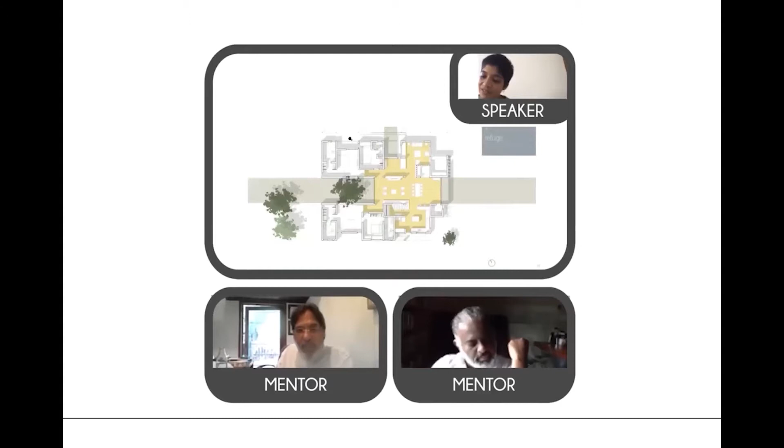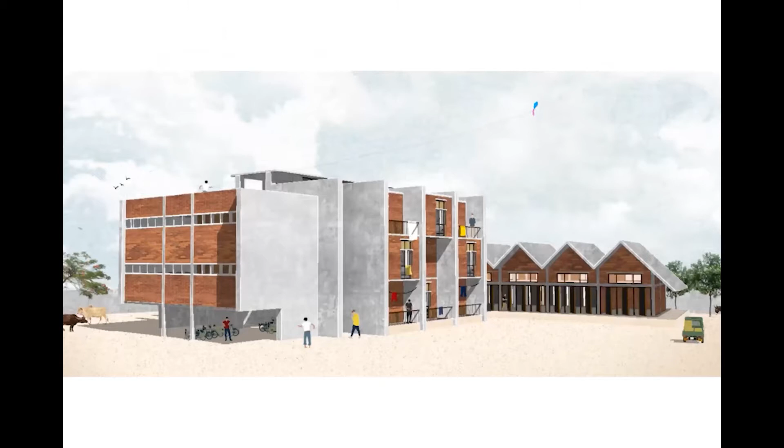Design United was created in March 2020 during a period of intense lockdown and quarantine measures within the region. The aim was to create an optimistic space for regional dialogue, connections, collaborations, and opportunities for young regional designers and design practices - a much needed network of support and peer mentorship during these uncertain times.

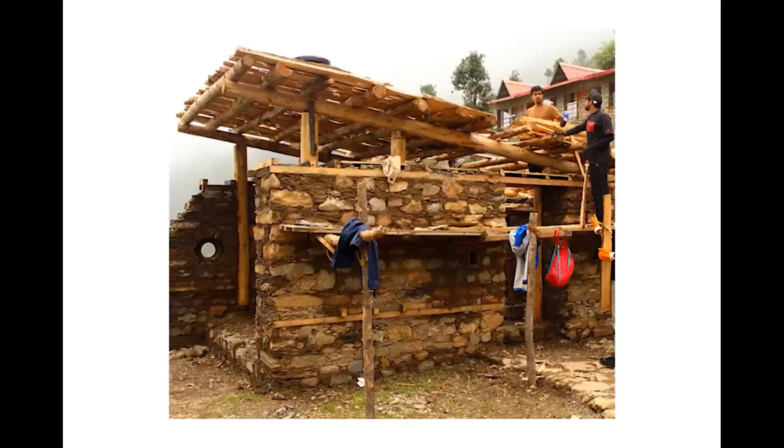Talented young designers and design studios working on design innovation with an approach relevant to our South Asian region have been invited to be part of the platform. Today's conversation is part of the Mentorship Series.

Mentorship and constructive criticism is essential for the growth of designers. Design United's Mentorship Series features two renowned practices from the region, Mindspace India and Kerry Hill Architects Singapore and Australia, with two exceptional designers and inspirational mentors joining us today: architect Sanjay Mohe from Bengaluru, India, and architect Tanuj Goenka from Singapore, sharing their experiences and design journey.

I'm Varuna Shashidhar, founder principal of the regional landscape practice VSLA, based in Bengaluru. I'm supported by my wonderful DU and VSLA team in this endeavor, along with Claywork Spaces.

Renowned Indian architect Sanjay Mohe was born and brought up in Mumbai and graduated in architecture from Sir J.J. College of Architecture in 1976, and went on to work with legendary architect Charles Correa. Mindspace was established in 2004 by architect Mohe, Vasuki Prakash, and Suryanarayanan. It is currently run by architects Suryanarayanan, Medappa, and Mohe.

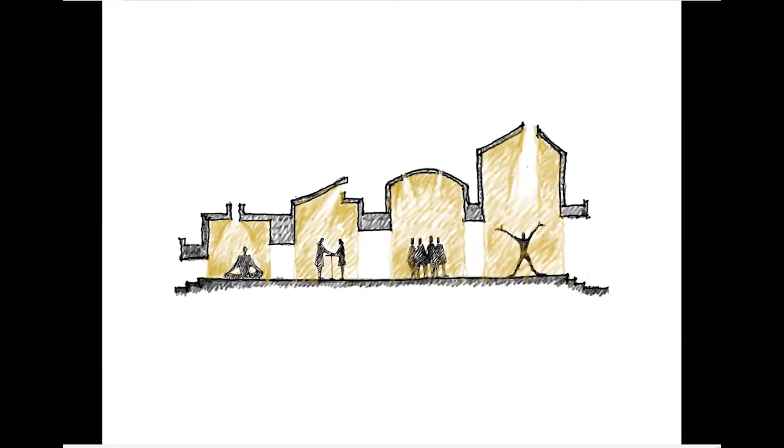But when we start designing, we start looking at different activities and then try to create a kind of space around that activity which would complement that particular ambience. So you start working with these different kinds of volumes, different kinds of light qualities, and start connecting those activities, and finally weave a story out of it. This has been the pursuit all the time, to achieve that in most of our projects.

Now, when you talk about the idea of a classroom, the idea of classroom comes much, much later. The first thing is to have a transfer of knowledge from the teacher to the student, and what would be the right space for that.

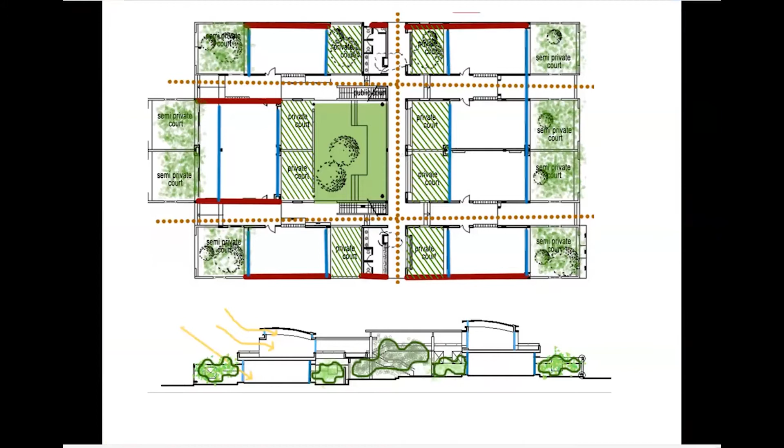Then when we started working on some projects where we try to look at the idea of a classroom, we try to give that option of either sitting in the classroom in an enclosed space whenever it is required, or sitting in a semi-open space, or sitting under a tree and then working. So you give different options for the activities and then try to respond to that.

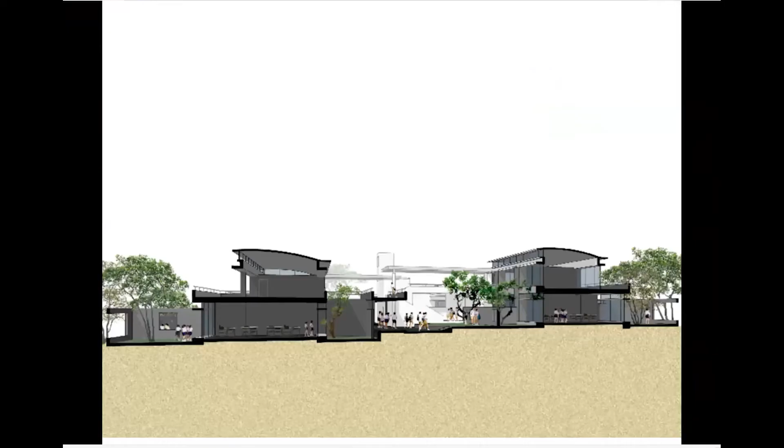Throughout the day, this road is so active, full of activities, that you never realize it is surrounded by these kinds of buildings, because the activities take over, the sound, the noise, and so many things happening around, and you never notice that these kinds of buildings exist there. Only in the middle of the night, when we used to work late on some of these designs and then walk on the middle of the road, would we notice this. So it's about the activities which really take over the architectural space and start dictating it.

So when you design architecture for the people, how do you really respond to this entire spectrum? You have a place at one end which could be a meditative place, and at the other end it could be full of crowd, full of activities, full of noise. So if you're looking at a meditation center as against a railway station, you have this entire spectrum, and you have to respond to the safety, the activity level, the sound levels, and the emotional engagement.

As a designer, you really have to look at all these aspects and try to see how do you stretch. Suppose you're designing a school - it has to have a place like a library and meditation place, so you need a quieter place. But when it comes to social gathering, the parents come together, it has to stretch to the other end. Probably when it comes to a house, you'd have a quieter place and a gathering space, but some houses entertain guests very often, and that's when it has to extend even further.

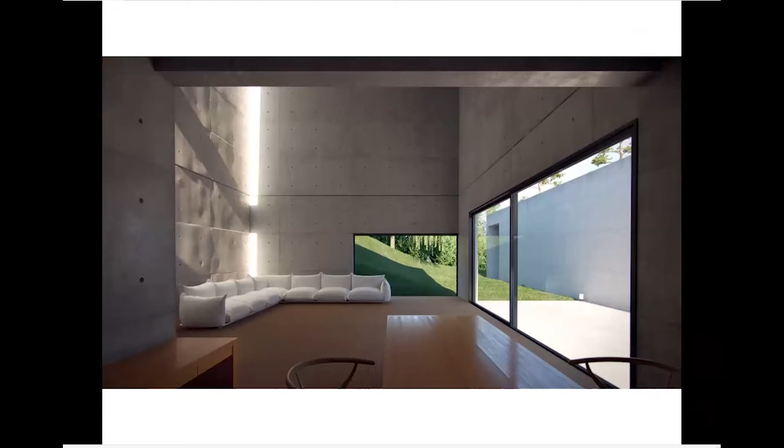This is more of a Japanese culture with tatami mats - absolutely minimal, very, very less furniture. It's something which is part of their culture, and they are most comfortable in this, and that's how Tadao Ando designs his work. We do get carried away by this because this is how we've been taught in all the colleges, everyone.

And then finally, we get absorbed into this whole background, and we sometimes lose our identity and become part of the background - that's our culture. So it's about absorbing memories, responding to that, and how do we really work with that?

So whenever you do a house, you try to make it minimal. This is a house which we had done almost about 20 years back - it started like this.

This is what typically happens in every house, because for the person who occupies the house, each object is a collection of a memory. It tells him or her a story, and they value it a lot. So for you as a designer or an outsider, it might look cluttered or terrible, but for the person, each object is telling a story and needs to have a place. This is how it becomes a collection of memories.

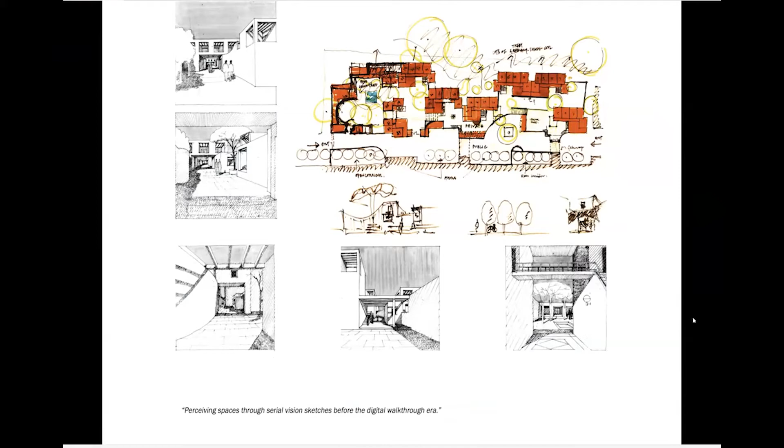This is something which we start. This is Satyajit Ray's sketches - before doing any film, he would actually capture that and then only start filming. This is something we had to do because we didn't have computers, so you'd either build physical models or do these sketches, which we still do, and this is where you have this unfolding sequence.

This is in Care College, where you create that path of discovery, or whatever ritualistic path. You go from here, go across, and keep discovering things, and this is what it looks like. You walk through this, go through that. You really don't know what is happening behind that, so there's a kind of suspense, a kind of curiosity.

It starts unfolding till it comes to this larger space, and then again you start walking towards the other side, go through that small opening, come to this tree, and get back. So this is the space I was talking about, which changes - these are recent pictures sent by students during lockdown, showing the way it is aging.

I'll show you about this Sai temple, which we did recently in Trichy. We had done one temple in Bangalore, and the Swamiji who was instrumental in that temple - his house, where he was born, is in Trichy. The management wanted to restore it, make it like a museum, a collection of his belongings, restore it, and then build a temple behind it. So this house plus the plot behind was what was bought, and this was the road.

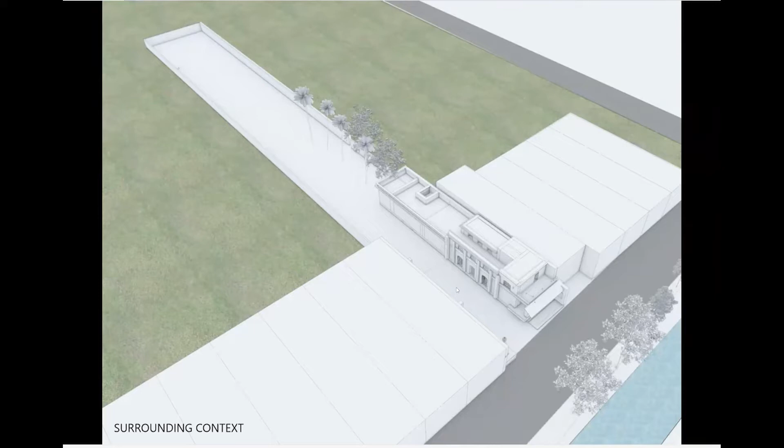This was part of the site, and the one behind as well, which is very long and narrow. We started working on it - water canal, trees, existing trees here, a very long and narrow site. Then there's one small Tulsi thing here, which became an axis to start the design, and we responded to that, creating a plaza and opening.

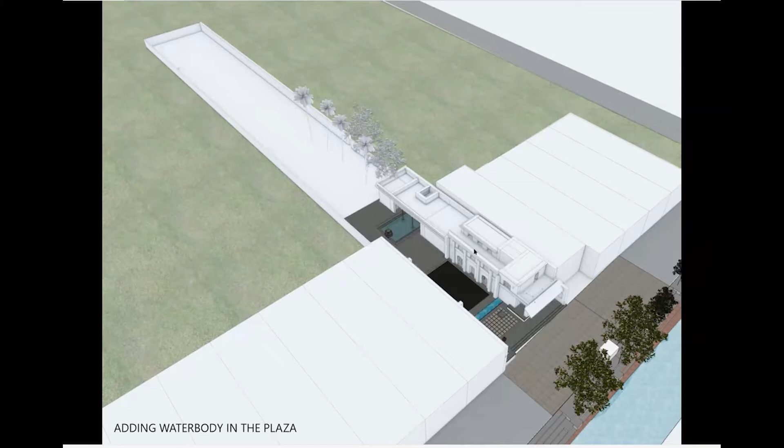This is where that well is, which I showed you. We opened this and created a water body there to open it up. This became a kind of threshold space, so we created these two walls to enclose that - you clean your feet here and then go in.

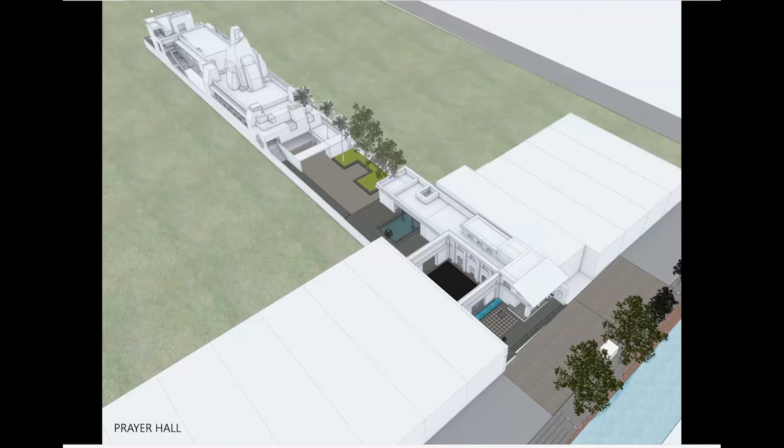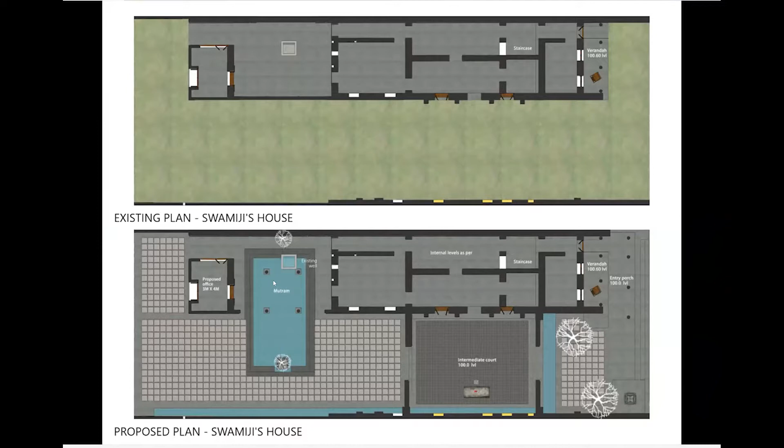This was a guest house they wanted, for a few people to stay. Then this temple came up, and we started developing this as an entire sequence of unfolding images - the sections where the light comes in, the different sections. This is how this space was, and we opened this and inserted this water body, which became a very interesting space when we saw people using it.

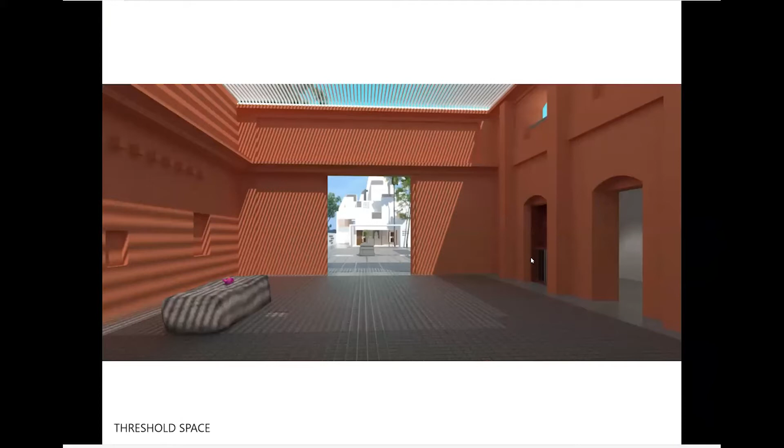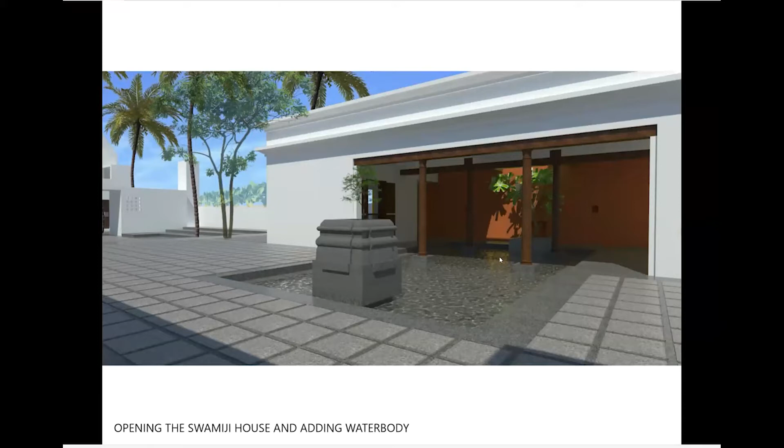These were very initial sketches. We opened up this so people can walk in, look at the belongings of Swamiji, and then go further to the temple - so this is how that transition space happened. This is that old well which opened up, and these were initial designs of the way the light would come into the space.

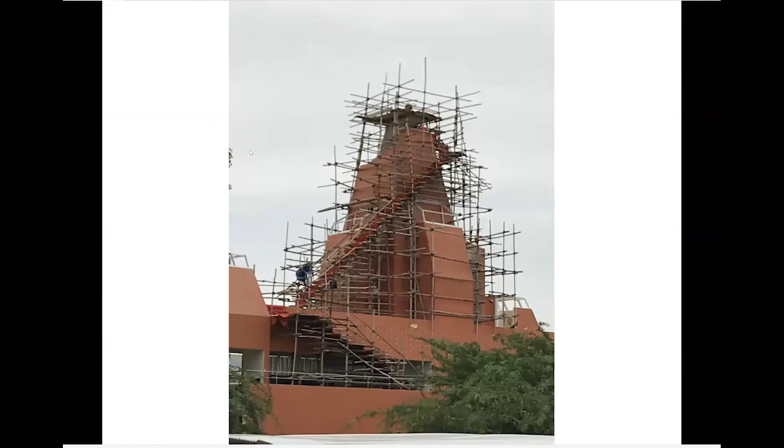Then the inauguration happened, and one of the rituals of inauguration is to have this kalasha here, where all the people go and do abhishek. The main deity has to be exactly below that, axially under it, so this thing was built mainly for everyone to climb up and do that puja.

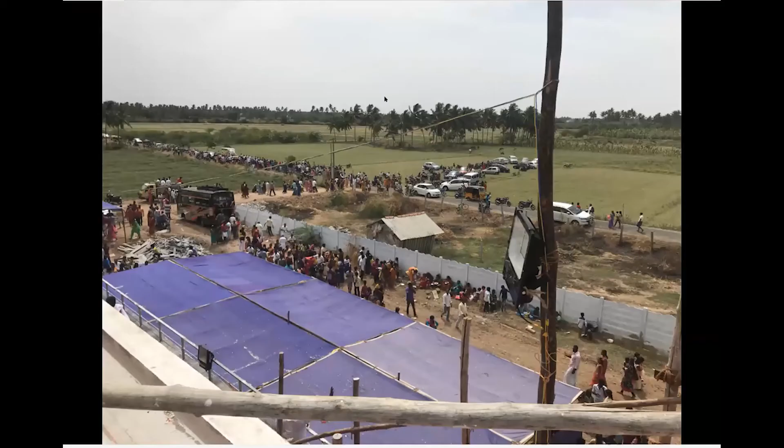It was amazing - this was such a quiet place, but when we eventually came during inauguration, we suddenly found people walking from all over, forming huge queues, and that was exciting. We couldn't even enter the place. So this is that in-between space, and then you see the temple.

And then this water body became almost like a sacred place. People almost everyone wanted to touch that water. Now, just after this, the lockdown happened, so after that we couldn't go there and take pictures as well.

Part of it is done, part of it is still going to happen. But as a ritualistic path, I wanted to show this project and the kind of people involvement, which is actually you design your buildings for the people, for this thing to happen. So if you see their faces and the kind of faith that they have, it feels very satisfying just to see that. And these were some pictures which we got a little later.

Actually, we have not visited it during the last almost 8-9 months. But this is that house. A lot of detailing still has to come in. But this is that water body, the front part, and then the... So these threshold spaces is something which our climate demands.

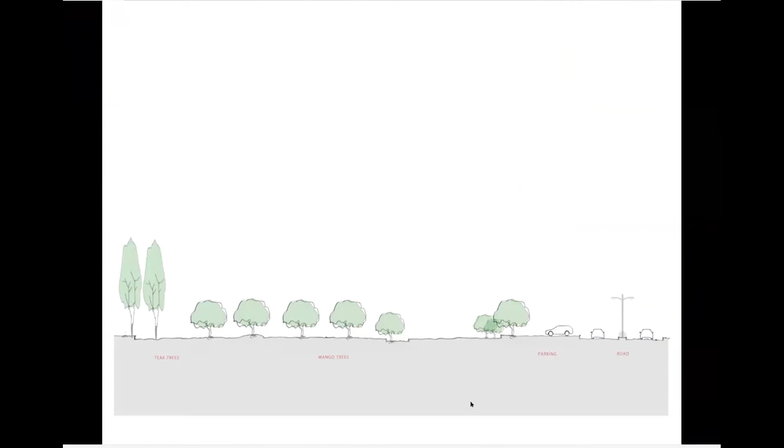Because it is your house, your belonging, and there's something very important happening inside. But that threshold space can belong to outside as well as to inside. And that's what fascinates us, and we try to create that in every project. How do you create that space which, when you are there, you wonder whether it belongs to outside or to inside. So when we were doing this school, which is for Brigade, this was one of these mango orchards kind of thing.

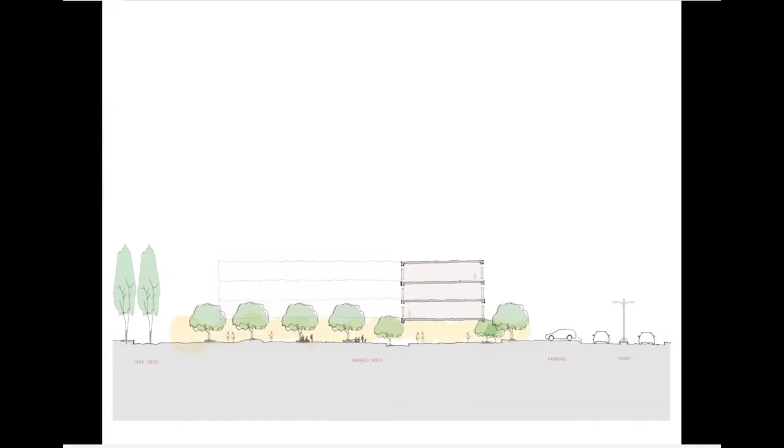So we tried to save almost most of the trees. A few, 5-6 trees had to go wherever this building came. But we wanted to create that transparency, that openness, and then float the building above, have this landscape going through, and allow different activities to happen here, because we felt that education doesn't only happen in the classroom. It has to happen under the trees as well, so that would become an extension of your learning experience.

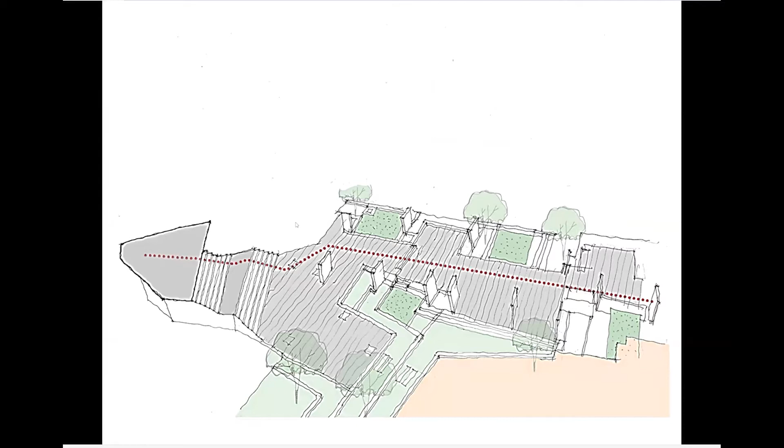And then this path starts from one end and starts climbing up across the spine. It becomes an amphitheater, then goes up, turns around and starts climbing up again. And at this point it becomes part of the facade. So the children, when they walk up and down, they are witnessing even the outside world. And from outside, when you look, you see the students running up and down, and we wanted it as almost a dynamic facade with the people's participation.

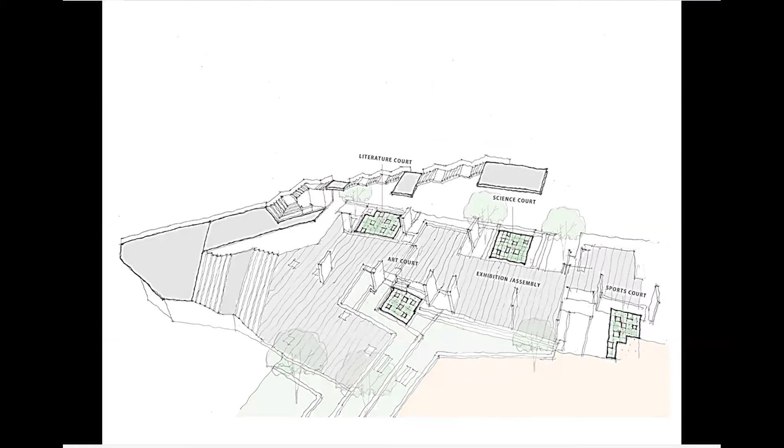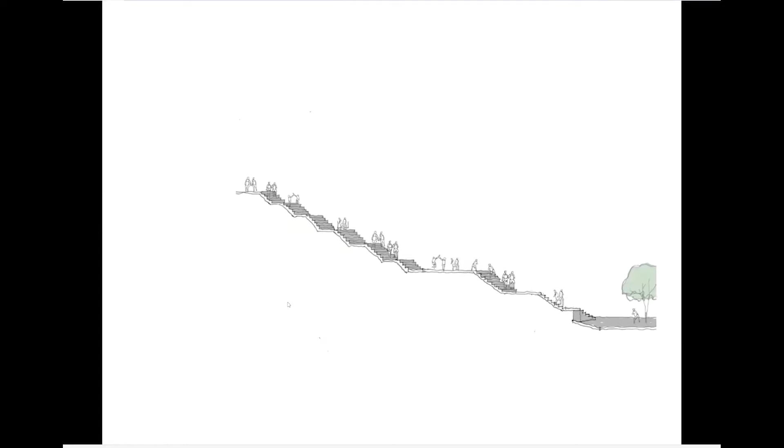And then you have a lot of these volumes where the classes would be conducted, and we're just responding to these volumes and creating that transparency across with different kinds of sections, so it's not like a ground floor or a first floor, just the spaces flow from one to another, and eventually it becomes part of the facade. So you come in from there, start climbing up, and then that becomes part of the facade. And these are the different volumes, different details.

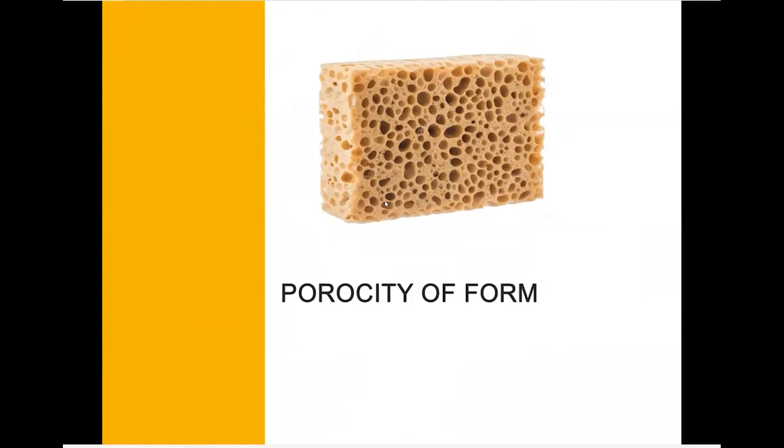But that porosity is something which is fundamental to our climate, and this is something that allows the breeze to go through. This is again completed during the lockdown, so the admissions are happening but the school is not yet open. Some kids had come to take admission, so that time these photographs were taken. So hopefully we want to see this full of kids running around and enjoying these spaces.

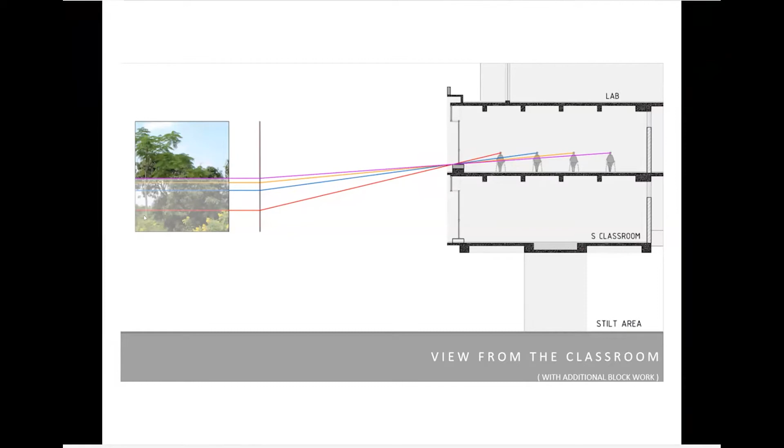The last one is about the pause, the meditative kind of thing—how do you really create those quieter places? IIM Bangalore by Mr. Doshi is probably the best example where you feel that idea of a meditative pause. When you are there, you have some sense of peace, some sense of tranquility. We've been fortunate to work on this building, trying to add a few things without disturbing what Mr. Doshi wanted to preserve, and trying to be as sensitive and quiet as possible.

What I'll quickly show is this memorial we did for Dr. Anji Reddy in Hyderabad. There's a video on this called Presence of Absence, so I won't go too much into detail since there's no time. There's a research center, and beyond that was his house. He would take that path to go to his house, and he would take some of these visitors, including some Nobel laureates, along this path while going to his house for lunch.

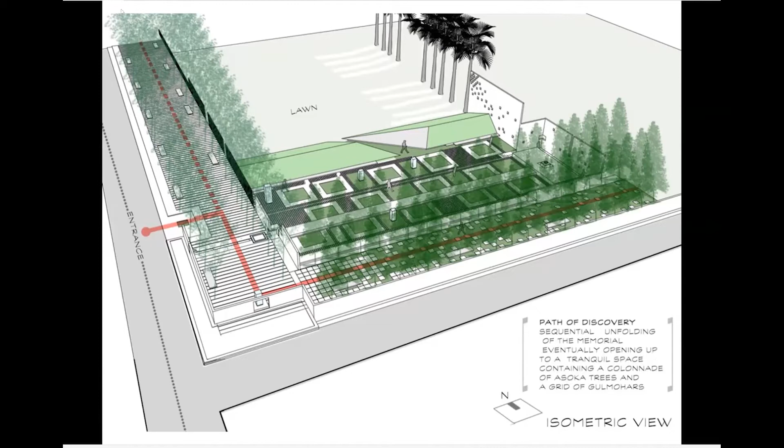On one end is his bike, which he used when he started his career. On the other end is his first Mercedes, which he was proud of. So as you actually climb up, you go towards that Mercedes, and there are different paths.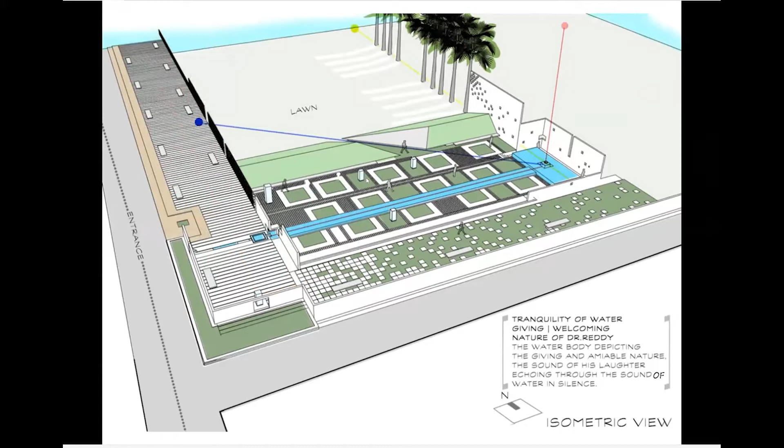So you have path one, two—there are four kinds of accesses where the collection of his belongings is kept. This is the path he used to take. This is where his ashes are kept.

This almost creates a void, and when you look through, you see this void, a reflection of that. During lunchtime, when the scientists take this path, they just get a glimpse of this, because a lot of them worked with him and get connected and energized.

You have a lot of benches here where you can sit, with motivational inscriptions on them. It's kind of a sense of discovery—you go there, you see this series of frames, you come in, and you discover the whole space.

That's the bike, the other end is a car. This idea of giving something, which he did throughout his life—either knowledge or money—you can touch it before you enter, and that's what is nice about it.

And you again rediscover it—that's the space, that's the void. As you walk through and walk down, this water level comes closer to your eye level, and then it feels much nicer there.

As I mentioned earlier, we have limited the theoretical ambitions of our practice to a few qualities. One of these is exactitude, and the other is authenticity. Exactitude in our projects means editing and distilling the design till there is neither too much or too little of anything, where one material pays respect to another.

Authenticity, on the other hand, is not so easy to read. It has to do with a genuine origin. It is felt as much as it is seen, and we believe it evolves through intuition as much as through critical observation.

Building appropriately is also very important to us. As future architects, it's very important to ask the question if one is in the business of architecture or practicing architecture as a business.

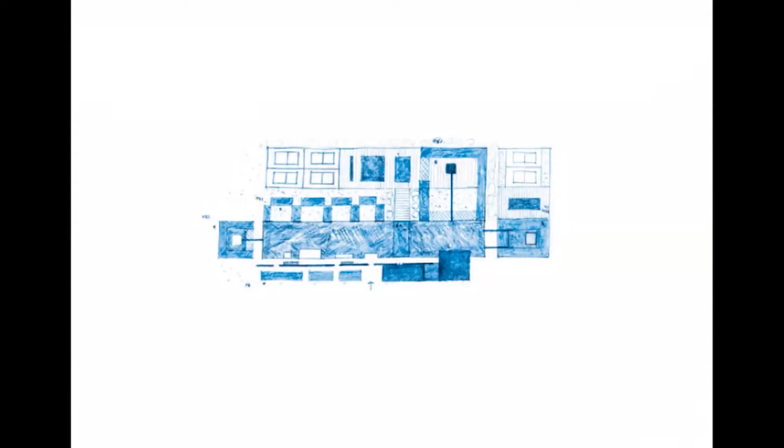The most unifying strategy in our work is the plan, which is very important. Plans embody abstract notions of building forms and volumes, tradition and culture, all of which shape our buildings and inform the appropriateness of architecture.

We extensively use models as a design and presentation tool, and our models have been exhibited in Tokyo and Shanghai. Over the last 40 plus years, our work has taken us from Nevis in the West to Japan in the East and across various building typologies.

This afternoon, I'm presenting 3 projects which represent 3 different contexts, 3 different project durations, and 3 very distinct journeys that the studio has been through. All 3 of these projects, I hope, embody the principles that I have just articulated.

I'll start with Maldives, which is a project currently under construction. This journey was a short journey. It's only 5 years long. The project is opening in the next 3 months. Maldives is our first island hotel that is under construction.

Over the years, we have been waiting for the right project to come our way that would allow us to break away from the expected way of building on an island next to water. For all our projects, we like to go back to first principles, draw inspiration from the site and its history, and explore a strong, contemporary, and appropriate response to the design brief.

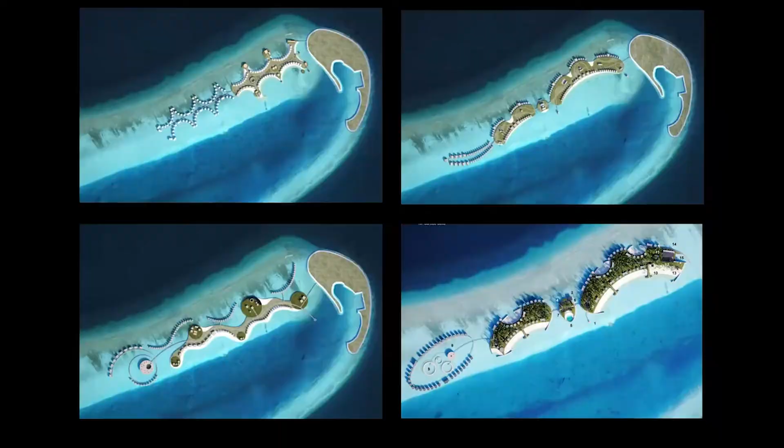So once we designed the shape, we took a decision that we are going to embrace the idea that the islands are man-made, like a lot of the islands in Maldives, not try to make the shape look natural, and embellish the man-made nature of these islands.

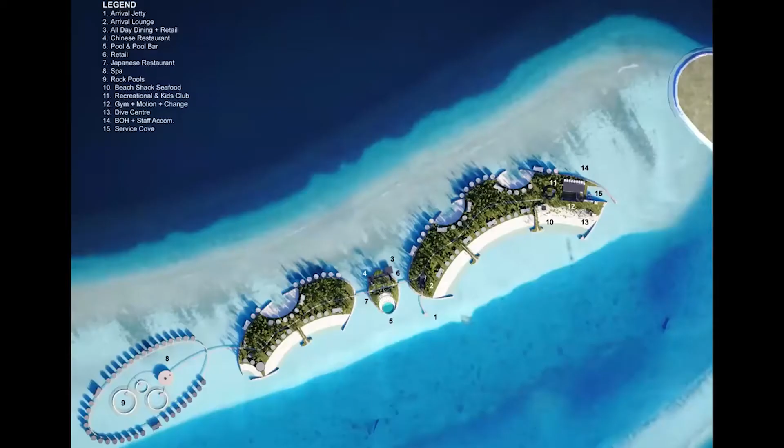So a few images showing the islands taking shape. That was the final master plan, which is a series of 4 islands from one end to the other. It's around 2.5 kilometers long. And it is a 100-room hotel for the Ritz-Carlton.

The islands, as well as the architecture, are very simple geometric forms and shapes. They express their man-made nature and a pragmatic response to the oceanographic conditions.

The islands taking shape on the reef start with a bund of sand. You start to understand the scale of the islands being reclaimed, and slowly over a few months the site starts to take shape, held in place with granite boulders forming revetments.

The site had two very distinct faces to it: on the left the calm lagoon, and on the right the open ocean. The shape of the island reacted to these natural currents. The side facing the open ocean was more protected and more solid, where most of the walls were, while the wide sweeping sandy beaches were towards the calmer lagoon on the inside.

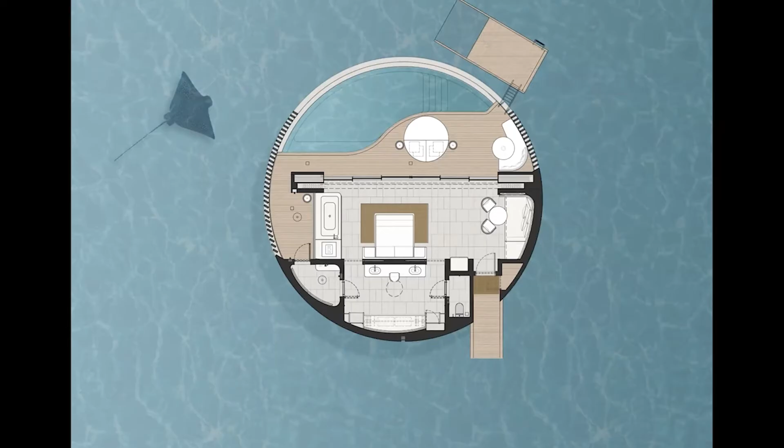Some initial models showing the guest room. Each overwater guest room has a private pool and a sun deck, but very simple forms, over water and on land.

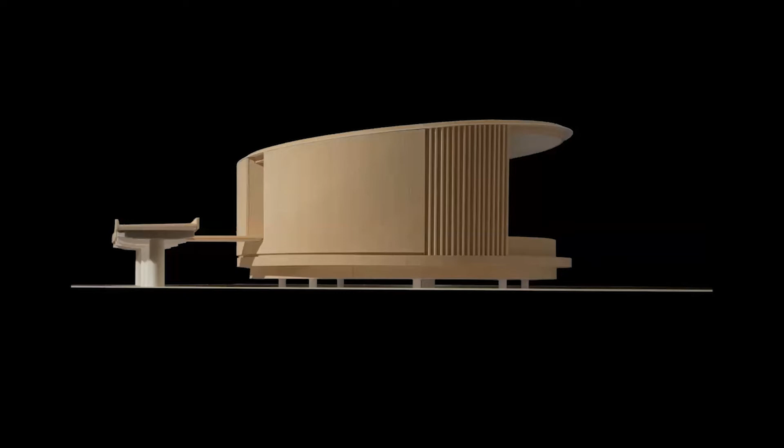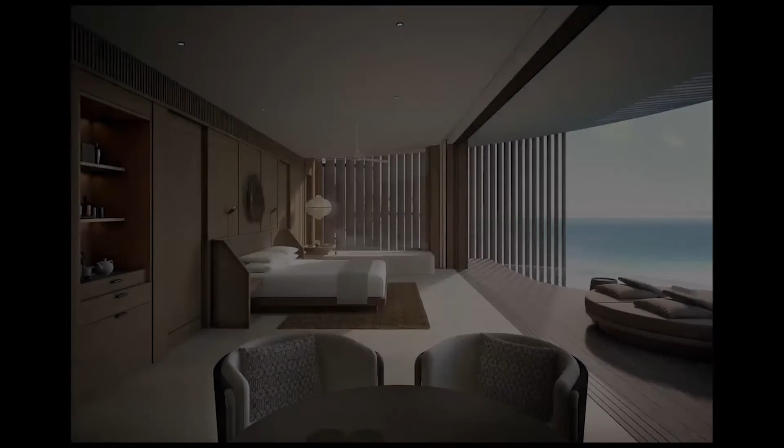While designing the project, we were quite aware that we needed to introduce sustainable features within the project itself. The shape and form of the building was influenced by the angle of the solar panels that needed to be installed on the roof, and close to over 30% of the energy of the project is from solar.

The detailing has been kept very simple, and exposed channels, as you see on screen, are neatly inlaid into the cladding and bring the water down from the roof.

So these guest rooms either form a ring of rooms over water, forming the water island with the spa in the middle, or on land, they are located in private alcoves and smaller beaches, forming smaller communities of guest rooms.

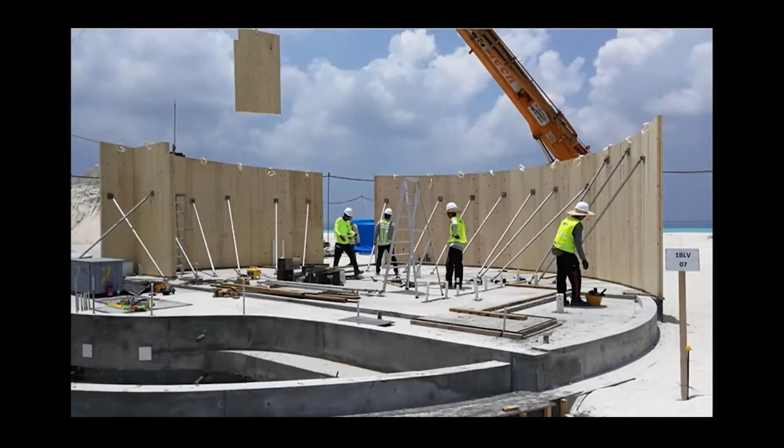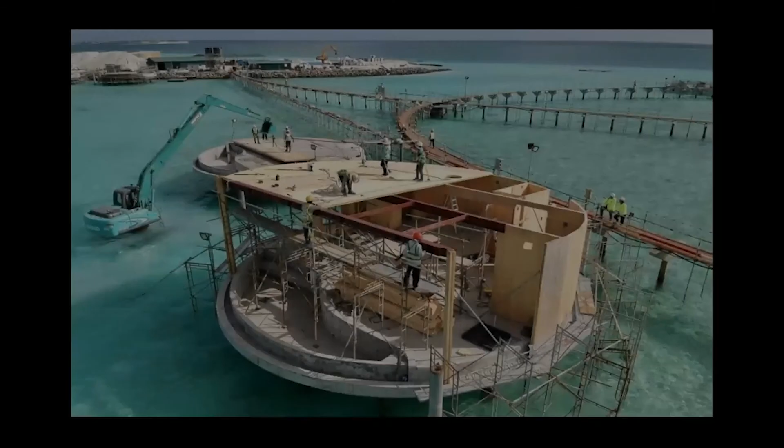We have used cross-laminated timber for the walls and the roofs, and this, together with the widespread use of photovoltaics, helps reduce the carbon footprint of the project. The CLT also allows us to keep the construction precise and reduces the amount of cutting and in-situ works on the property itself.

Each one of these 80 square meter structures takes 4 days to complete on site because of the assembly of the CLT.

In addition to the guest rooms, a lot of the public area buildings are also built with the same CLT material. We have developed a series of very simple pavilions and frame structures which have been used at different scales across the project to form the public areas and other buildings.

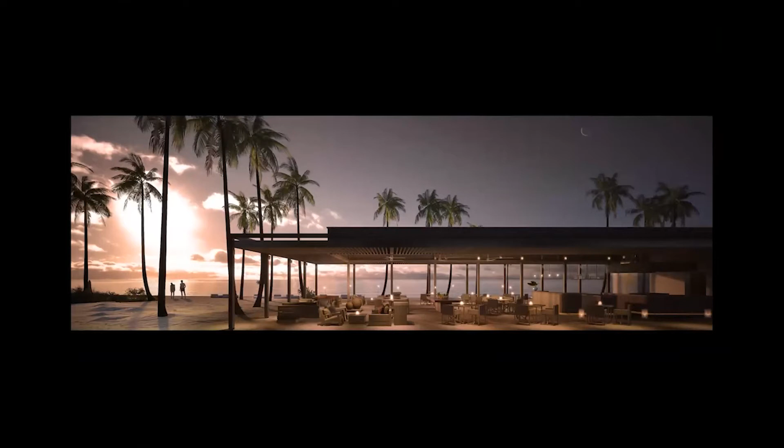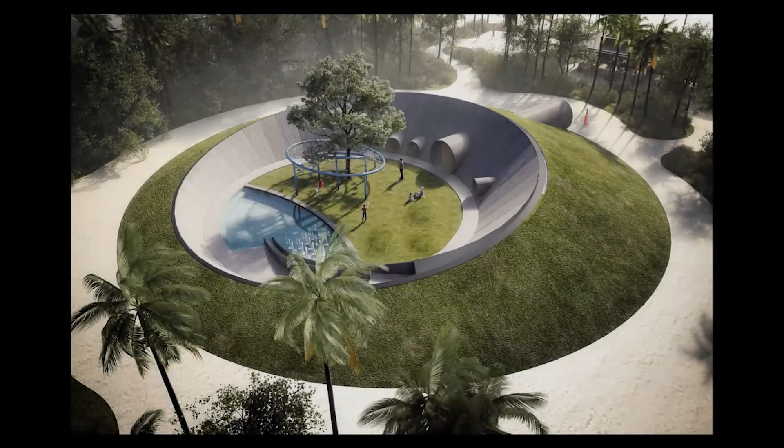We've also enjoyed designing other elements in the project, like the Children's Club, which is a world created for the children in the center of the island. So there are different destinations that have been created within the project itself.

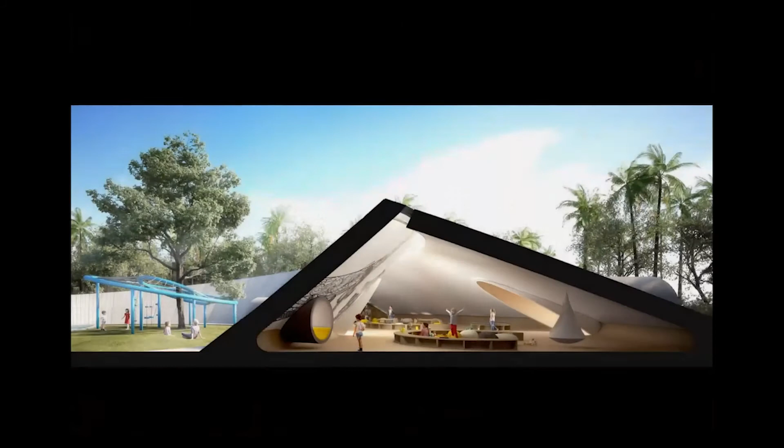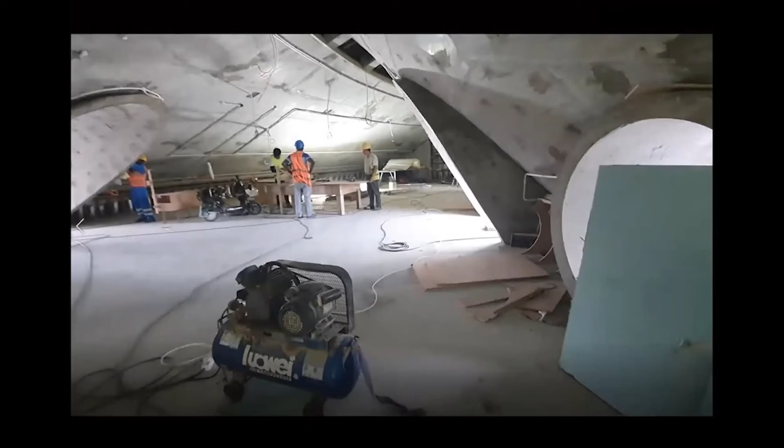Just like the guest room, the spa, which is in the center of the water island, is a circular form which looks inward into a courtyard. With the lighting designers, we have designed the spa facade so that it prolongs and extends the sunset around the project. The lighting has been designed to work with the normal sunrise and sunset times and glows to prolong the sunset itself.

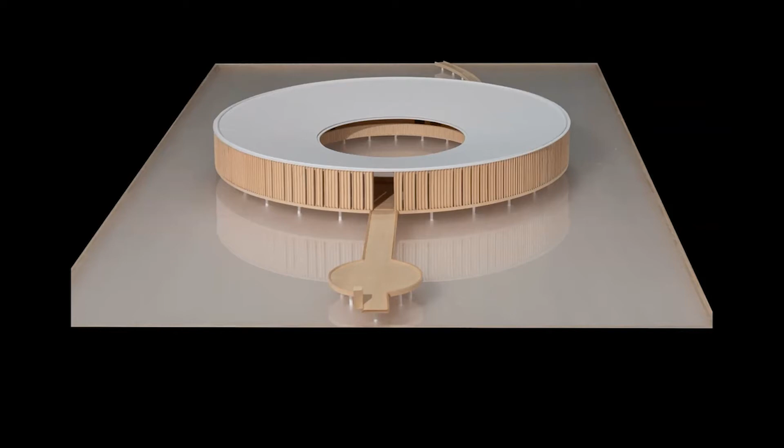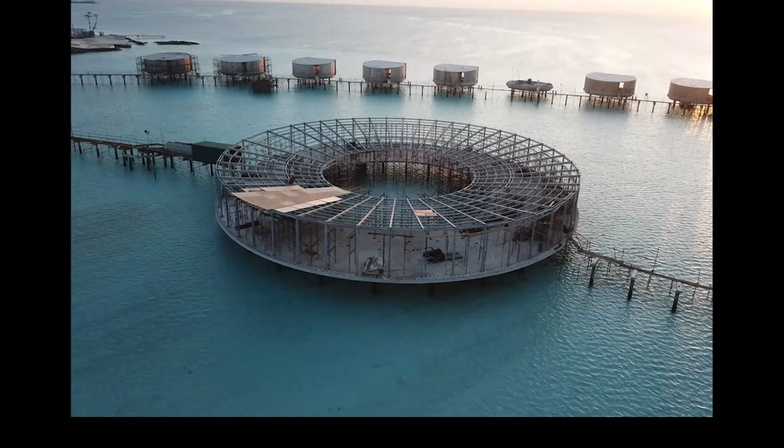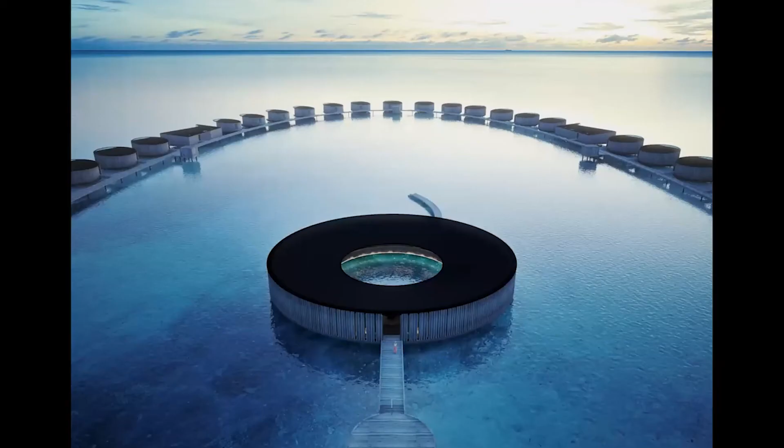This is an old slide, but it shows the spa under construction with the guest rooms around it. Another view of the spa.

The property, as I mentioned, is scheduled to open in May this year, and it has been an interesting journey for the office to design something which is for the Maldives—it breaks the traditional way of building in the Maldives and gets away from it.

The second project I'd like to show is Aman Yangyun in Shanghai. The office has been working on this project for close to 10 years, and we continue to work on the larger community around Aman Yangyun. I think we'll continue to work on it for the next 10, 15 years.

The story of Aman Yangyun begins about 25 years ago, 700 kilometers southwest of Shanghai. A construction of a large dam threatened to destroy villages which contained very ancient Ming and Qing dynasty houses, as well as a mature camphor forest.

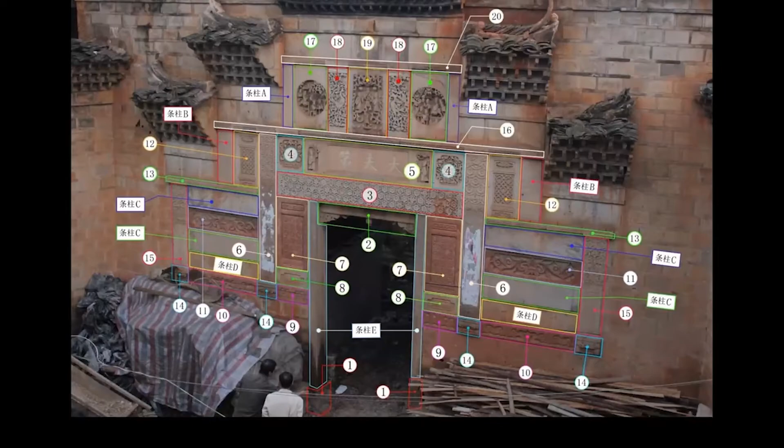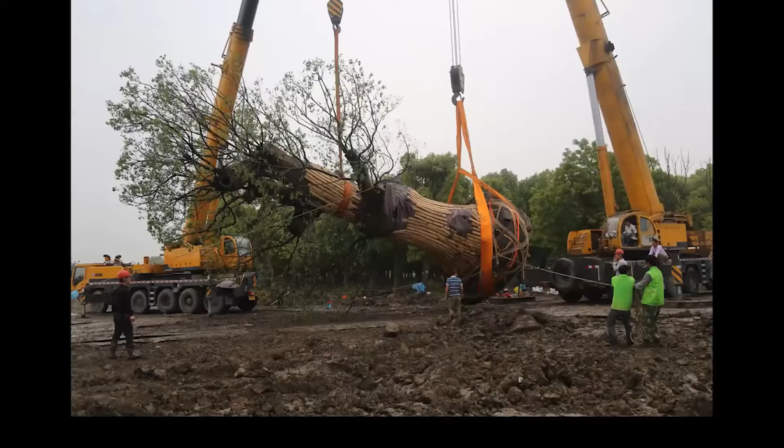Our client began a private initiative to rescue this valuable heritage, documenting and dismantling over 50 of these houses. Every brick, tile, stone, and structural timber was transported to Shanghai, where they were stored in warehouses and reassembled with great care and skill. In addition to the houses, 10,000 camphor trees, many with trunks over 1 meter in diameter, were transplanted to a tree nursery close to the project site.

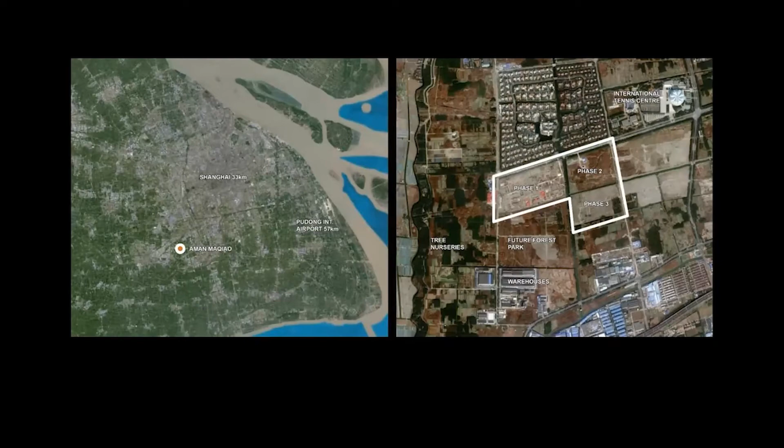In 2009, we were asked to imagine how this collection of ancient houses could be resurrected and woven together with the trees into a master plan for a 43-hectare site on the outskirts of Shanghai. The master plan consists of 4 quadrants separated by waterways. Aman Yangyun was conceived as a contemporary walled village in a forest, and a riverside avenue leads guests to the arrival.

Spaces unfold at a variety of scales, becoming more intimate as we move from the main avenue towards the hotel arrival or the residential villas.

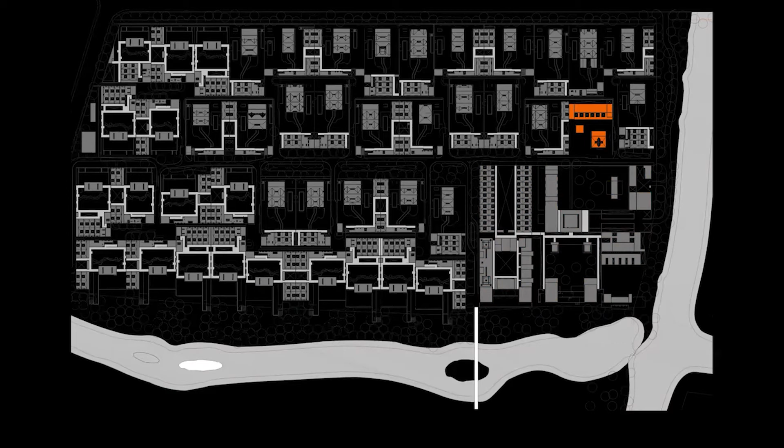This slide shows the location of the hotel and 24 suites. The Nanshufang, which is the library, used to be the school of the village before it was dismantled and moved to Shanghai, and now has become the cultural heart of the property. 43 villas make up the Aman Yangyun community, out of which 18 are private and the rest are part of the hotel.

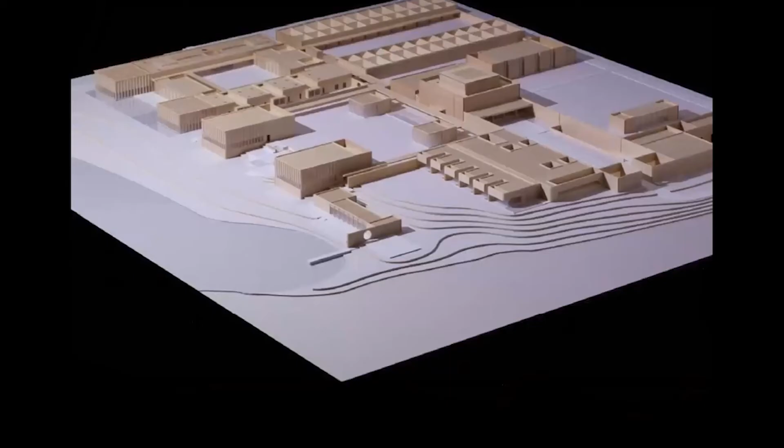The master plan creates opportunities for every venue to have a distinct landscape setting, from the arrival to the hotel, which is a strong cubic form with a glazed lantern on top that glows at night and floods the interior with sunlight during the day. We've kept the entrance quite modest, so it contrasts and heightens the sense of drama as you enter the main reception space.

The interiors are paneled with finely crafted screens, which we designed for the project, made from Nanmu, a gold-flecked wood traditionally used for noble Chinese buildings. This geometric screen pattern is an abstraction of a traditional Chinese cloud motif.

We're using these screens, and for most of our projects, we design from master plan all the way to the architecture, the interior, the lights, down to the soap dish in the rooms. We are involved in all scales of the design, which helps us keep the integrity of the project and a common thread to it.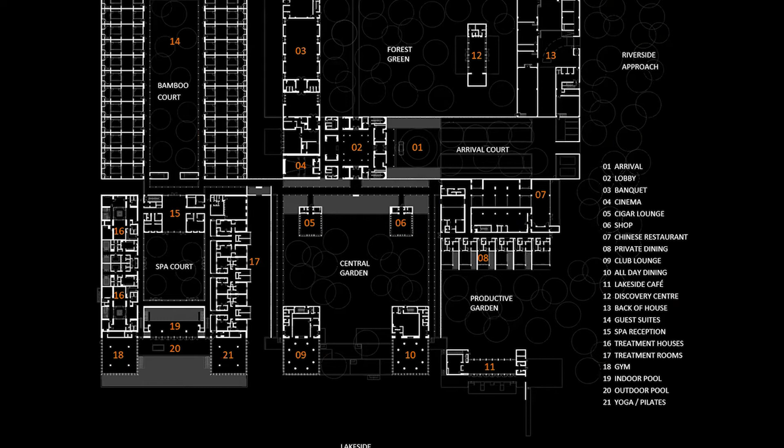The buildings around the central garden are kept as simple, rectilinear architectural forms, clad in a pale gray Chinese sandstone. Walls are load-bearing, made with solid blocks of the same sandstone.

Movement around the hotel is a carefully orchestrated journey. Dining terraces and restaurants overlook the lake and the forest park across the water.

Because the site was not able to accommodate all of the camphor trees that were moved to Shanghai, the city established a forest park across the hotel, across the lake, which took the remaining camphor trees.

Views of the landscape and filtered sunlight animate the tall volumes of the main restaurant. In contrast, the Chinese restaurant is more internalized and borrows light from courtyards.

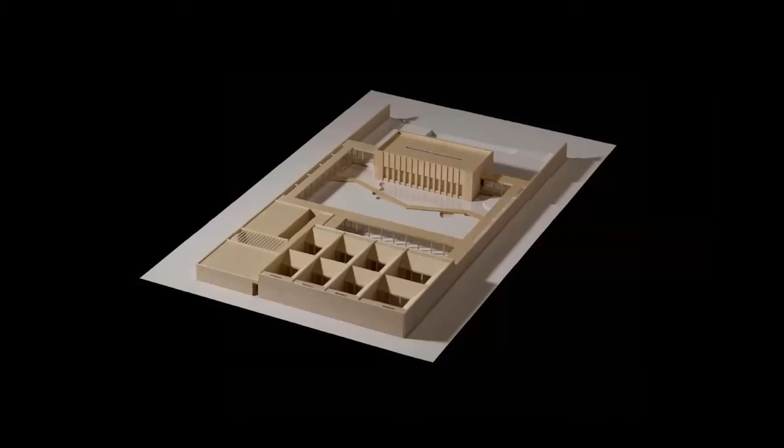The villas are designed as a walled garden with either a contemporary pavilion, which is what you're seeing in the model, or an antique house at its heart. Each villa sits on 3,000 square meters of land.

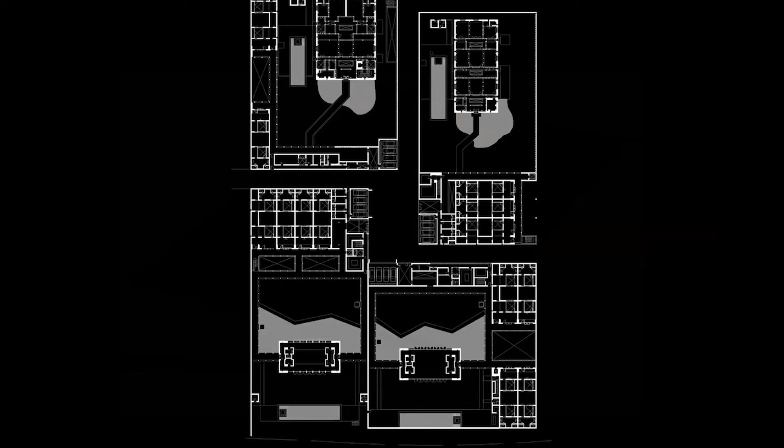These villas are clustered in groups of 4 or 6 with entries from shared courtyards, again creating communities. Thresholds and changes of scale are a recurring device within the architecture of Aman Yangyun.

One courtyard leads you to another, and each courtyard has its own character. They form thresholds between private and public.

The private gardens within the villas, as I mentioned, either have an old ancient house or a contemporary pavilion.

The landscape elements for the project were designed specifically for Aman Yangyun. That's one very interesting aspect of this project, because we were given enough time by the client to develop the project and develop different elements of it.

We were able to work with local artisans and craftsmen from across China. Before we even started designing the project, we spent a fair amount of time in China going to the villages from where these houses came from, to understand how they were lived in.

We worked with different experts that the clients introduced us to, so that we could understand with their help how to design and work with these ancient houses.

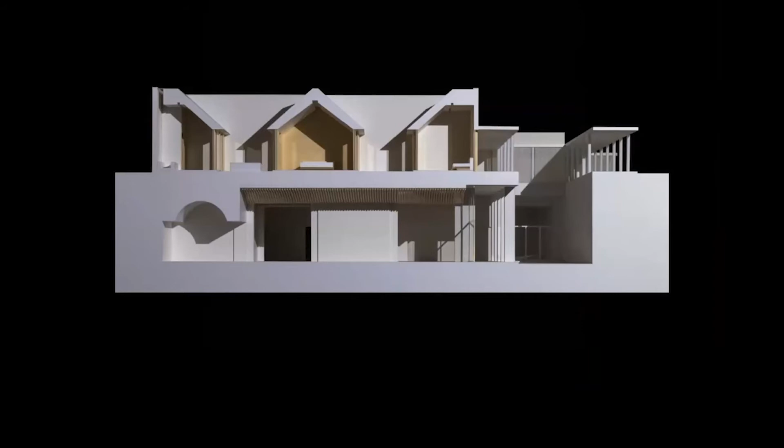Each villa has also extensive basements with tall vaulted volumes and galleries, which borrow light from generous sunken gardens. And the basement provides amenities like cinemas, wine cellars, gyms, in addition to the art galleries.

Another interesting aspect of this project is the ancient houses from the Ming and Qing dynasty. We had a team working on understanding these houses and their ordering principles. All 50 of the houses that were dismantled and brought to Shanghai were different in shape and size. But when we studied them in detail, a common thread and types started to emerge.

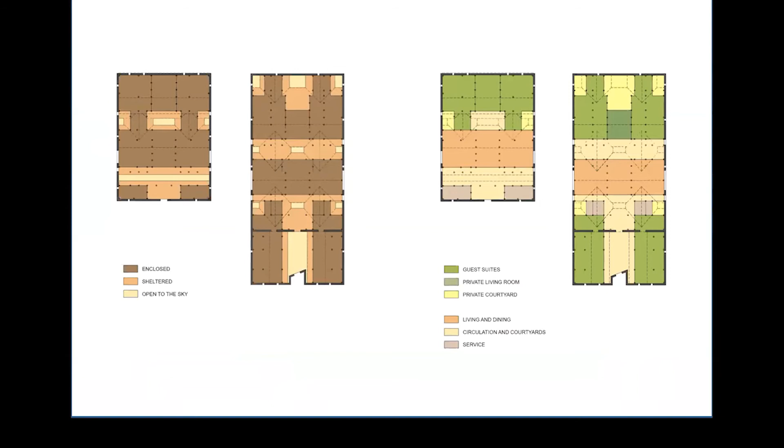The sizes were quite different. Some of the houses were over 900 square meters in floor area, and others were smaller at 300 square meters. So again, to adapt the houses for it to function as a hotel, accommodation, and public areas for the villas, and also bring in modern amenities and weave in MEP and fire and seismic requirements was a challenge.

The walls of the villas are formed by the new, with the old located within the garden. We had the time, thankfully, to go through prototypes of the antique houses, how to assemble them together, and how to bring light and ventilation into the interiors without disturbing the fabric of the antique house itself.

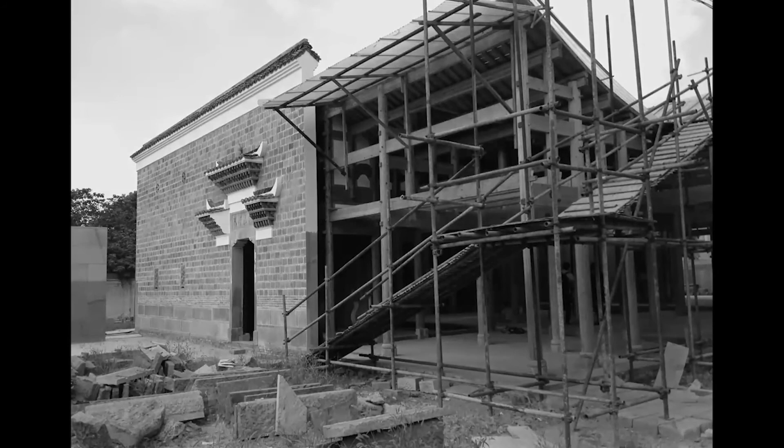The original team of masons and carpenters who dismantled the houses over 20 years ago, they were responsible and they worked with us to put them back together again. Most of these houses do not have any nails. It was quite important to find the point from where you start dismantling without breaking any of the timber. It's like a jigsaw puzzle.

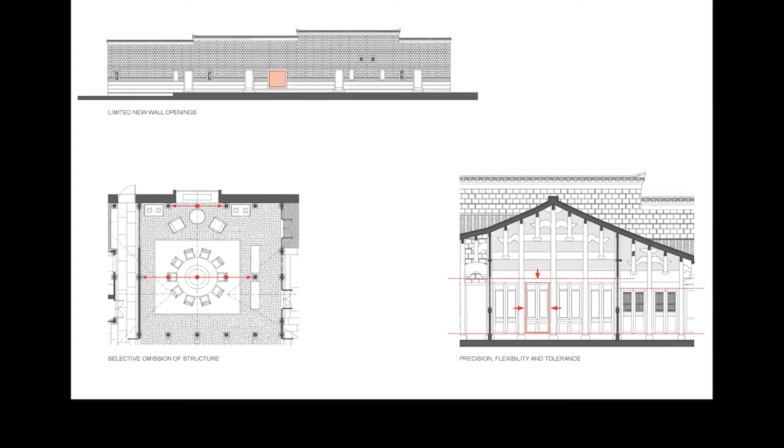Targeted modification to the structure and fabric of these houses were made to make them livable. In certain cases, trusses were shifted to optimize room dimensions. But again, when we were designing the interiors and the architectural shells and adapting them to suit what was requested by the hotel, we were quite careful to make sure that whatever was new was very clearly articulated. Some of the ceilings were omitted to reveal the spectacular roof structure.

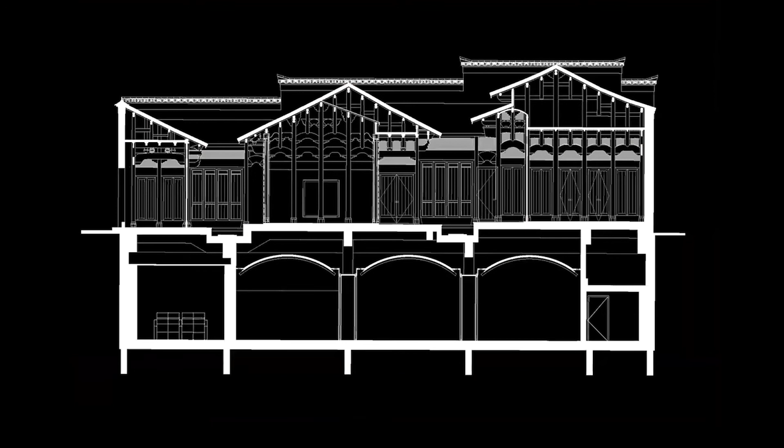All the furniture, all the elements which were added to these houses have been kept freestanding to make sure that they feel as if they're temporary occupants of these historical houses. All the new elements that have been inserted within the fabric of the house are very honestly expressed in a contemporary architectural language.

Within the antique houses, the custom designed furniture and joinery is always freestanding, including the washrooms, emphasizing the transient nature of the furniture that occupies these houses, maybe for the next 50 to 100 years, and then the same houses would have a new occupant in a century. So everything that we have added to the houses is temporary, whereas the houses themselves are permanent.

The Nanshufang, or the library, is the cultural heart of the project. It's one of the most magnificent antique structures of the property. This is where a lot of guests congregate, and where different cultural activities, whether it's calligraphy or incense burning, are offered to the guests as part of their stay at the hotel.

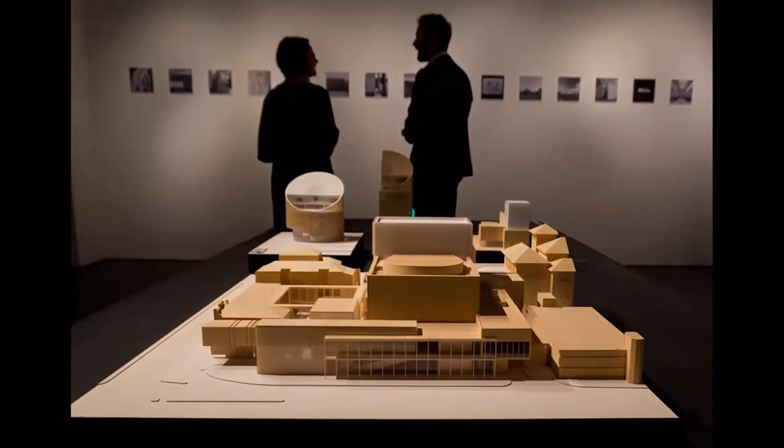So the project won the UNESCO Prix Versailles World Award for hotels in 2018.

The third project I'd like to show you today is the Aman Kyoto, which is one of our oldest ongoing projects in the office, and opened last year. And just like Aman Yangyun in 2018, this project won the UNESCO award for hotels last year in 2020.

Aman Kyoto has seen a synthesis of many disciplines involved in the approval, design, and construction process over many years. This project has been in the office for close to 25 years, and it's a matter of perseverance and patience to see a project like this to its conclusion. Through these years, the project has started, stopped, started again several times, as the cycles of economy of Japan or changes in the approval process in Kyoto and property ownership came into play.

It's located very close to the Golden Pavilion, which meant that the project had to be respectful, obviously, to Japanese culture, but it was both important to the custodians of the temple itself and also the city of Kyoto.

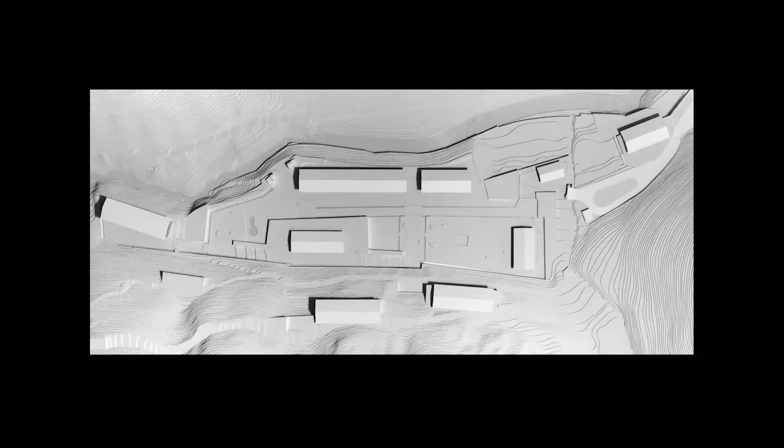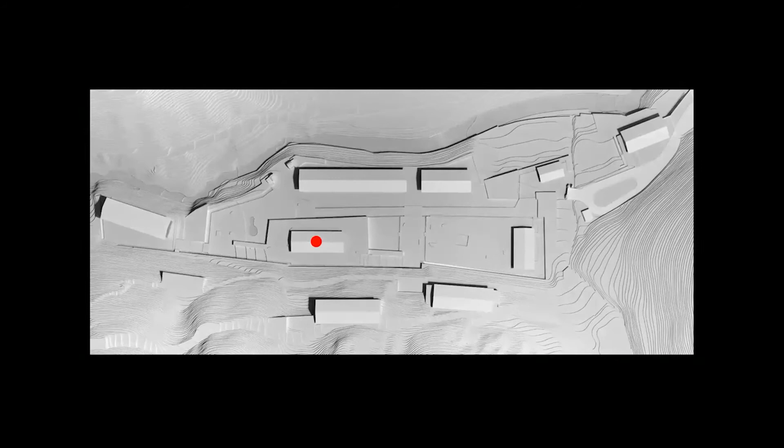The arrival, located close to the gate that I showed you earlier. The main living pavilion, which looks out over the garden with the sculptural rock formations. The dining, which looks over the stream that is on the top of the screen. The spa, located internally, opening up to its own garden. And 4 two-story pavilions housing a total of 26 guest suites have been placed on the platforms overlooking the main garden.

The architecture has been kept visually simple to allow nature and landscape to dominate. It's not about the buildings, it's about the garden. The buildings have to be the backdrop. The materials and proportions of these pavilions are intended to feel Japanese while not being traditional.

The entrance to the property remains through the original gate, the copper gate, which is in its original location. Guests are received in a small arrival pavilion, which is very simply furnished.

And just like Aman Yangyun and Maldives, we've designed all the furniture, the light fittings, and the accessories for this project.

The original avenues, now restored, lead guests through the gardens to their suites, and it's a testament to the contractors. They preserved the moss which was on the rocks. During construction, they built shelters for the moss, and after the project was finished, the moss was laid back. They also had construction vehicles designed specifically for this project that could go over the stones without damaging them. So there was a lot of effort put in to preserve and maintain the garden.

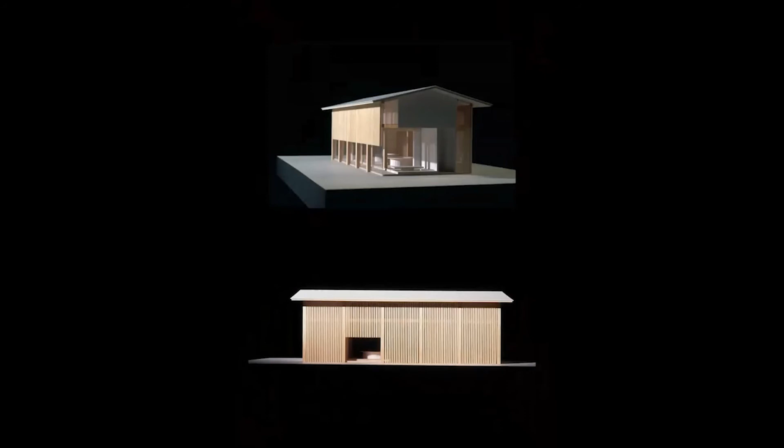The main restaurant is located outside the main property gate, and it is open to both in-house guests and visitors. Commissioned artwork announces the arrival to the pavilion. You can see the lights which have been designed for the project. That's a few views of the restaurant.

So Aman Kyoto has been a very interesting journey for the office, and each of these three projects represents a different region of the world, a different brief, and a different response. Thank you very much.